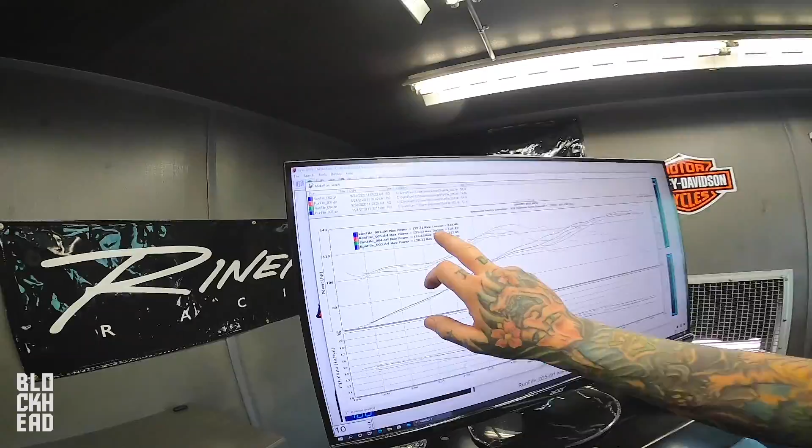Right off the bat, this is what you get. It's not tunable. This is what you get right out of the box if you do the 131 and then put the TBR 2-into-1. This is somewhat of the notorious 2-into-1 torque dip that you may or may not have heard about. Those of you that have 2-into-1s, we're gonna end up having to tune all this out.

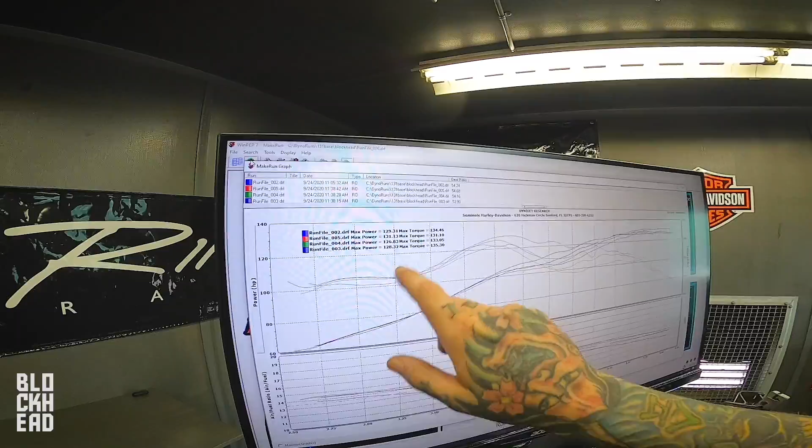If you see the numbers, it looks like on our 5th run we were at 131 and 131 squared. Our first was 129, 134, 126, 133, and 128, 135. So if we use the last run as a squared 131, 131, that's our base, that's where we're gonna go up from.

Let's all keep in mind, this is not tunable as it stands. So that's it. You can't change your fuel tables, you can't change spark tables. There's not much you can do, really. You can buy their auto tuner, which would probably help to rectify quite a bit of that, but again that's another upsell. Doesn't come with a kit. It's something else you'd have to do.

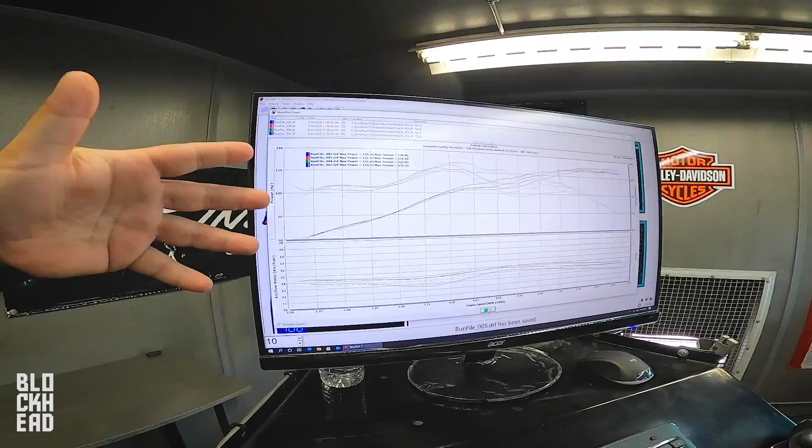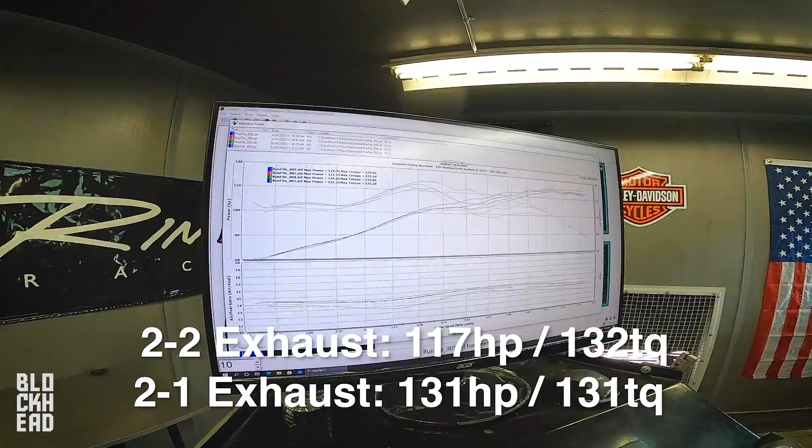So pipe to pipe, we're talking the 2-to-2, the numbers you guys saw last, which once again were 117 horsepower and 132 torque, was with the Bassani radial sweepers, and then with the Two Brothers Racing Shorty Turnout 2-to-1, 131 squared, 131. There's also, just for furthermore, this 131 and 131, if you noticed, that was my last pull.

That was the one I wasn't sitting on. Came up at least 2 to 3. Torque number came down because I'm not sitting on it and putting all that torque down, but the horsepower went up. That is the sensitivity of a dyno, like I mentioned previously, like how dyno room to dyno room, there are differences.

What is the standard for dyno? Is there like, you are supposed to be sitting on the bike, you're not supposed to be sitting on the bike? I was trained by people that sit on them. Mike used to teach it, he sits on them. The first time I ever learned at AMI years ago, we were sitting on it. The non-sitting is a personal preference thing, and you can manipulate the numbers a little bit by doing that.

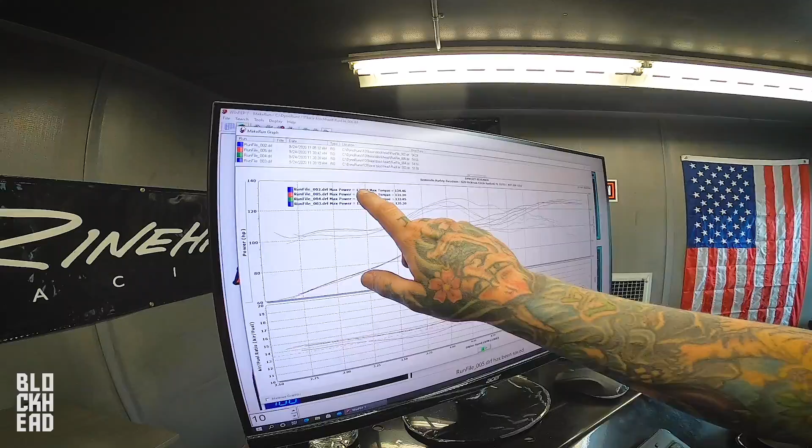We went up, if we used the first run at 129 and 134, we came down here but we went up here. We basically traded those numbers. So you're trading horsepower for torque. That's about what they advertise, give or take. I think they advertise, what, 135, 140 for torque.

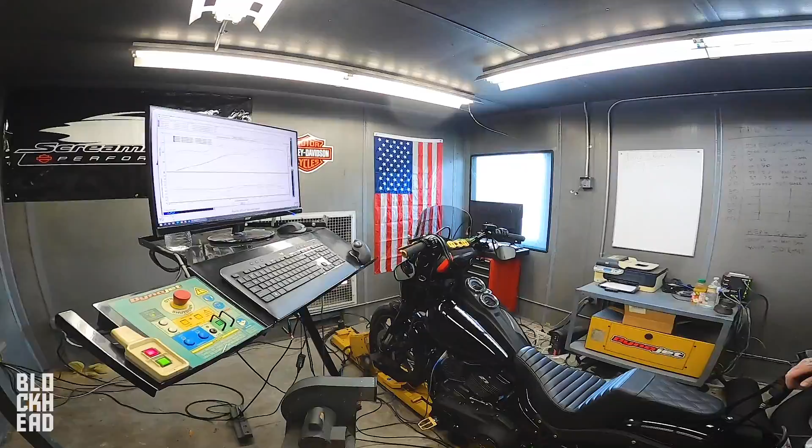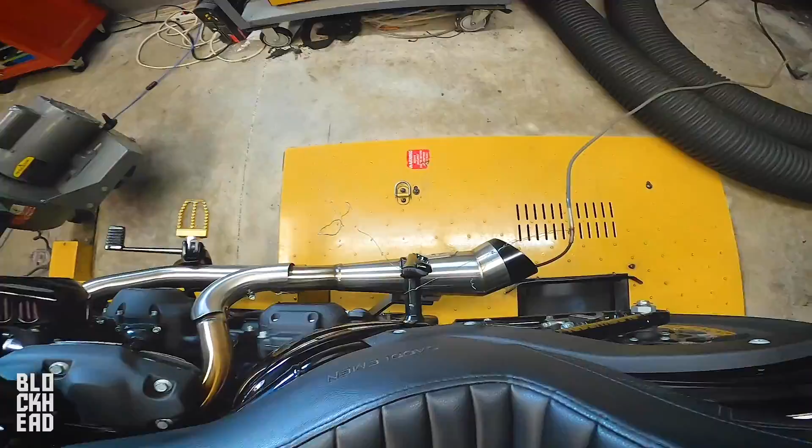Yep, which is good. That's respectable no matter where you're at. The thing about that is some people are saying you could get more based out of such and such kit, lower displacement but higher numbers. But that's we're gradually getting into all of this where we're gonna squeeze as much as we can and find out. We're going to be showing you guys, the 2-to-1 was like one correction that we're going to do. And a lot of people are going to go 2-to-1 if they're building out a performance bike, because the proof is in the pudding.

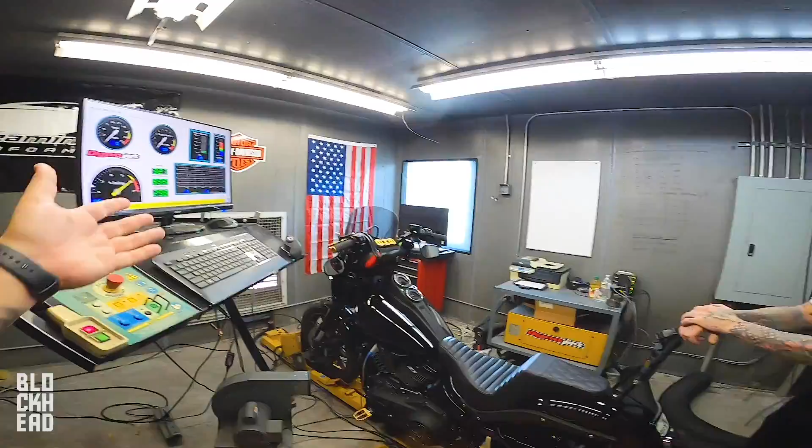You're going to see both the shit numbers and the good ones. Because let's be honest, we throw it in out of the box, the numbers might come down and look like shit again. And that's okay.

And so that's one of those things for everybody posting negative comments and kind of hating - in the beginning I said we're not trying to hide anything, we're totally transparent. The exhaust is definitely what it is, and I'm not so prideful that I won't admit it's not the exhaust. We all kind of knew it. I'm not the master of physics here, but it's your bike.

Yeah, exactly. And if that's what I wanted, then that's what I would go with. But all of this is more for you guys.

I don't know how many of you guys know that, but this was Block's brainchild, and we're going through the entire process because I've always been curious about this stuff. To actually have access and be in here working with you guys, getting the knowledge - I've learned an absolute ton thus far, and I really hope you guys are learning a ton too. That's the purpose of all this: to show you guys what the procedure is, what the process is, and learn as much as we can without boring you by going too crazy technical.